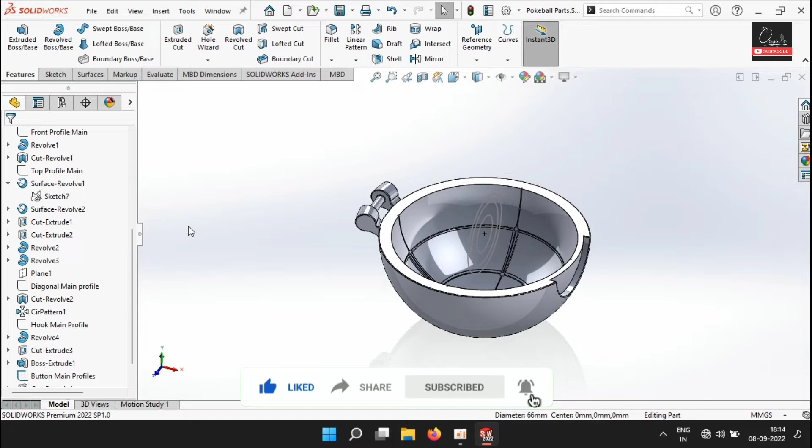In this session, we are going to make the upper half of the Pokeball, which will be similar yet different from the bottom half. First, select the top plane and click on Mirror. Go to the drop-down of Bodies to Mirror, select the bottom half of Pokeball, untick Merge Solids options while leaving the rest as they are and click OK.

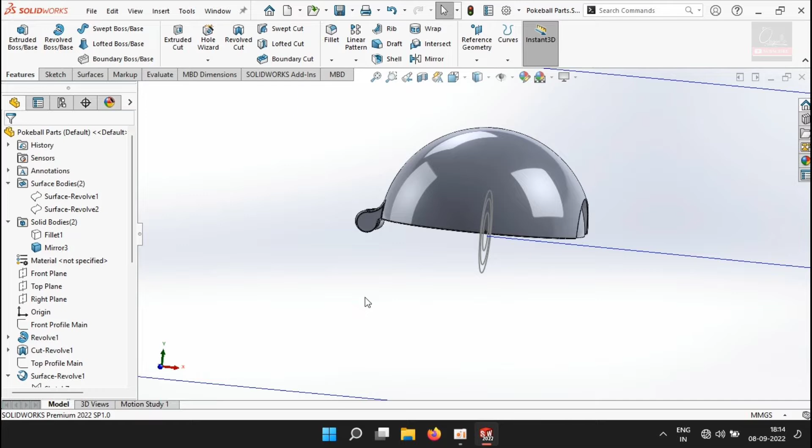Now right-click on the bottom half and hide it. From here onwards, we will make sure that whatever features we use are propagated to this body only unless required otherwise. As we are focusing on making a manufacturable design, let's remove the impracticalities one by one. First, there is a gap between the upper and lower half.

To make it perfectly closed, we will select the front profile main, make it visible again, select the front plane and create a new sketch.

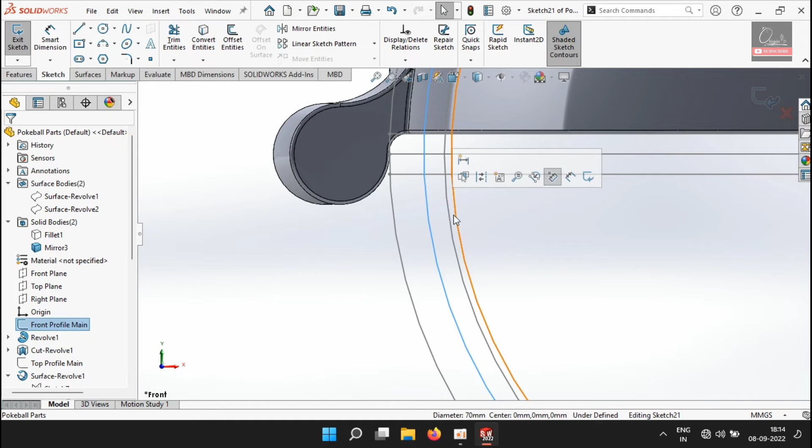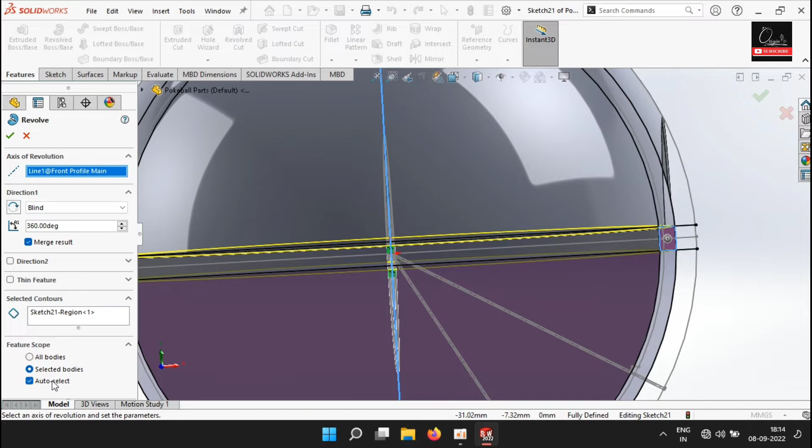Select these profiles and click on Convert Entities. Go to Features tab, choose Revolved Boss/Base, choose this region, untick Thin Feature if selected by default, let Merge Result option be ticked and select this vertical line as axis of revolution. Set Feature Scope to Selected Bodies, untick Auto Select, select the top half and click OK.

The next impractical thing here is the hook, which cannot be same as the bottom. So we are going to get rid of it.

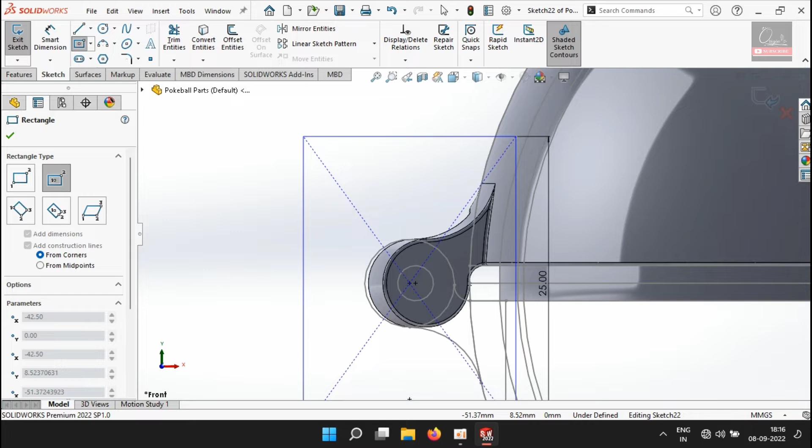We will create a new sketch on front plane, make the hook main profile visible, create a square with leftwards hook center with side lengths of 25 mm, click on Convert Entities, select this circle and press OK.

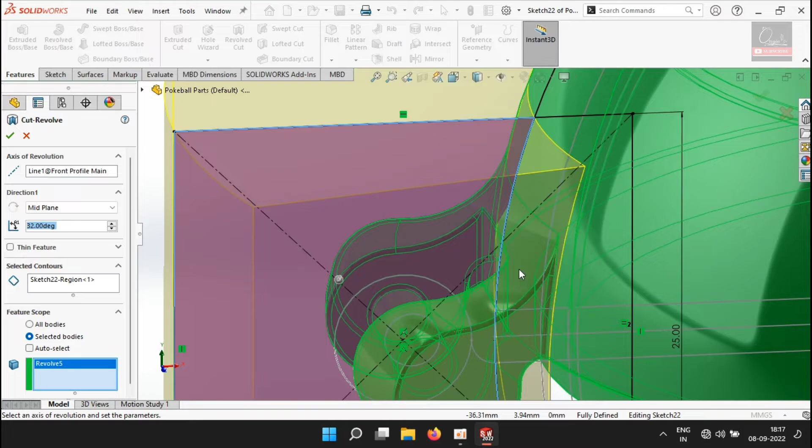Go to Features tab, select Revolved Cut, select Axis of Revolution, make direction 1 mid-plane. Select this region as contour, set Feature Scope to Selected Bodies, untick Auto Select and select the top of Pokeball. Input angle as 32 degrees and click OK.

Though we removed one impracticality, another has arisen at the cut section in the form of irregularity in fillet. So to remove this, create a new sketch on front plane, select this line and circle and click on Convert Entities.

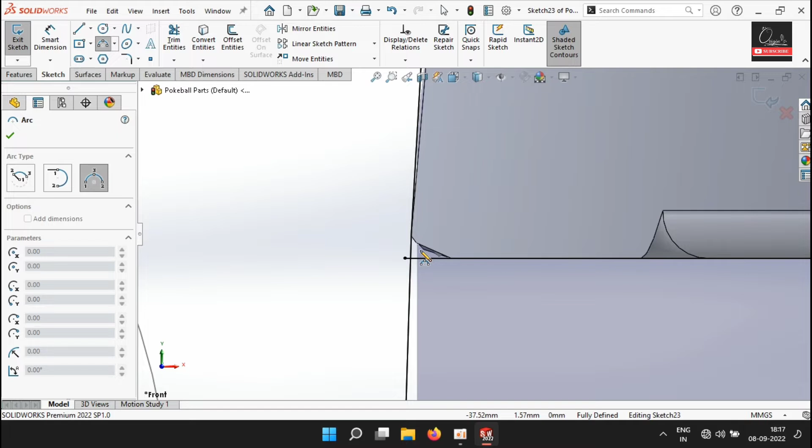Now create a 3-point arc on this line and circle with radius 0.25 mm like me. Also set this arc to be tangent to the line as well as the circle. You might get a notification for overconstrain due to this coincident relation, just remove it and reset the arc point manually.

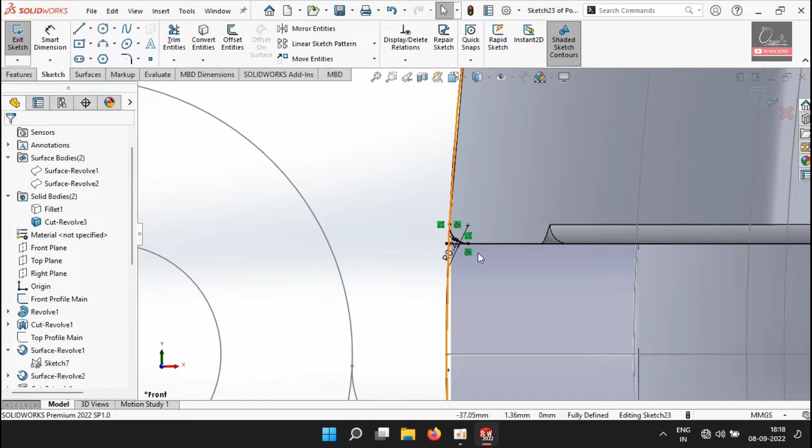Now go to Features tab, click on Revolved Cut and like the previous step, remove the region between this arc, line and circle. And that takes care of it.

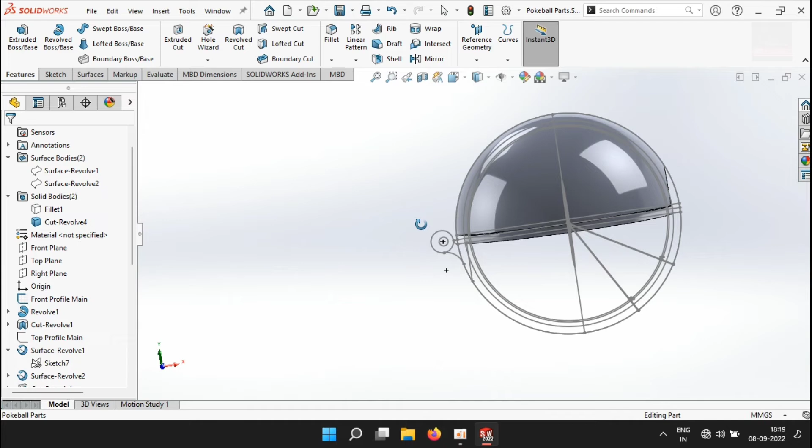With this, you can hide all these sketches for the time being and make the top profile main sketch visible. Our next goal is to make these inner line cuts continuous.

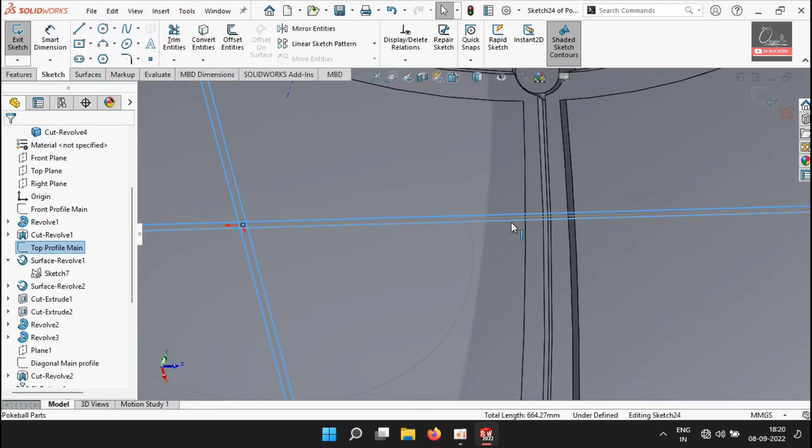Create a new sketch on top plane. Select these profiles and click on Convert Entities. Make the surface revolve 1 visible again. Go to Features tab, select Cut Extrude and follow what I am doing.

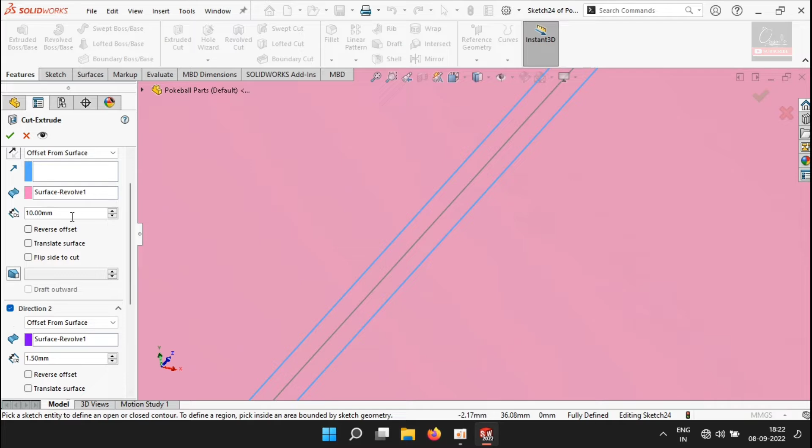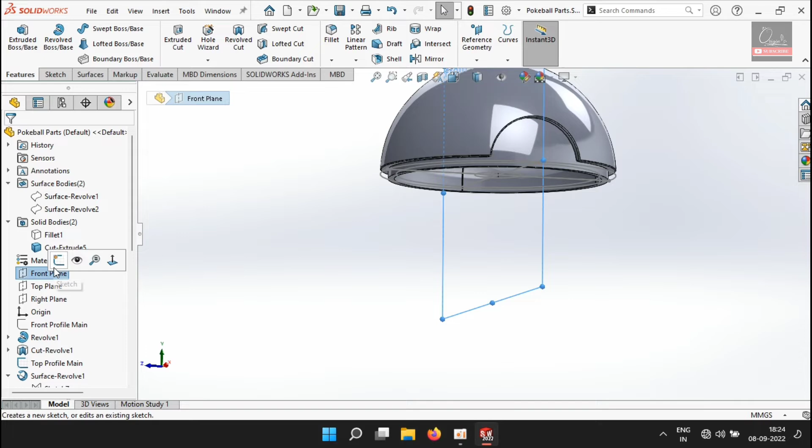That's more like it. Now let's create a hook to be aligned with the bottom half's hinge. Create a new sketch on front plane, make the front profile main visible. Select these profiles and click on Convert Entities.

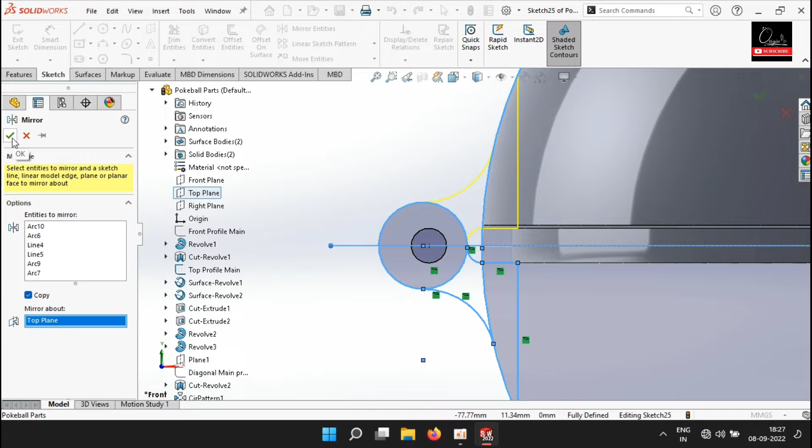Select the top plane, click on Mirror Entities, tick Copy if unchecked, select these profiles and hit OK. Delete this arc and make these profiles construction geometry.

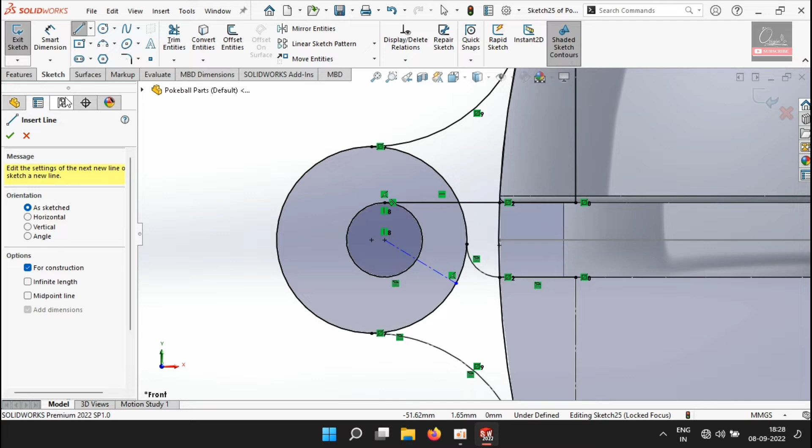Create a horizontal line between the top of the inner circle and the mirrored line. Create a center line from the center of this circle like this. Choose Smart Dimension and add an angular dimension of 22.5 degrees. Create a circle with center on this line and make it tangent to both these circles.

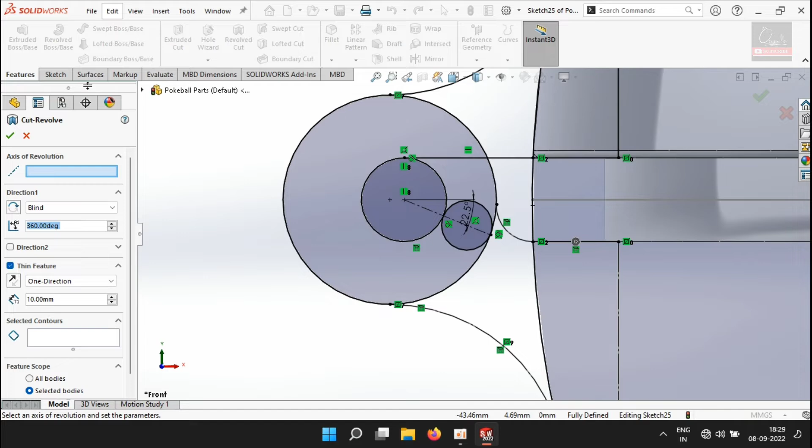Now go to Features tab, click on Revolved Cut and follow my lead. Always make sure that feature scope is for this top half only.

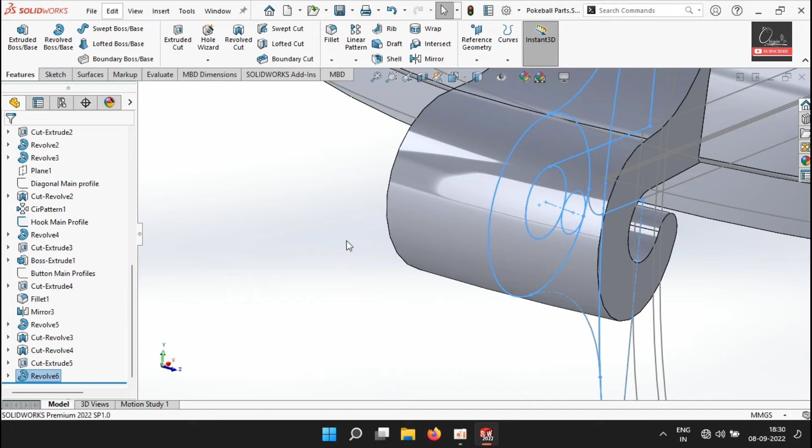Now if you remember correctly, the hinge bar on the bottom half is a straight cylinder, while the hole in this hook follows a curvature, so we need to correct it.

Create a new sketch on front plane, select this circle, click on Convert Entities, go to Features tab, click on Cut Extrude, select through all both, set the feature scope to top half only and click OK.

Now, if you know manufacturing or have learned degrees of freedom, you might know that this arrangement of hook will be subjected to wobbling during opening and closing the Pokeball, so we need to split it into two hooks.

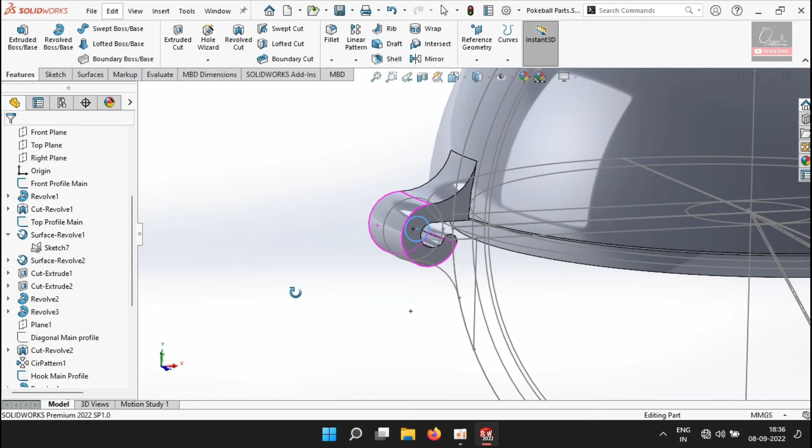Simply create a new sketch on front plane. Make a rectangle with this center of the same dimensions as me. You can take other dimensions as well, just make sure the rectangle is bigger than the hook profile it overlaps with, yet at the same time should not touch the bigger circle.

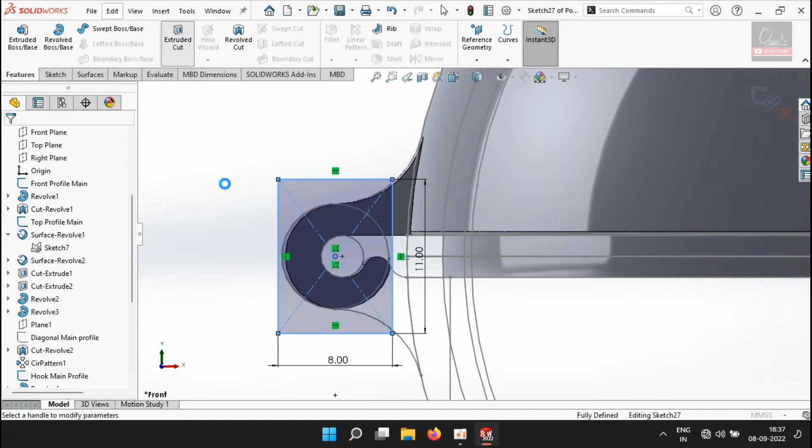Go to Features tab, and create a cut extrude of 3 mm from the mid-plane. With this, we are just one step away from completing this as well.

Now follow these steps to add the cherry on top, I mean the Pokeball button. Hide all the unnecessary profiles and make the button main profile visible.

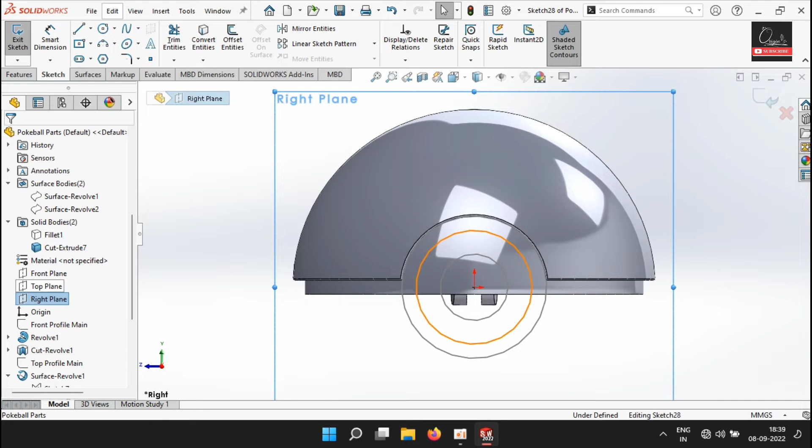Create a new sketch on right plane, select the middle circle and click on Convert Entities. Make the front profile main and surface revolve 1 visible.

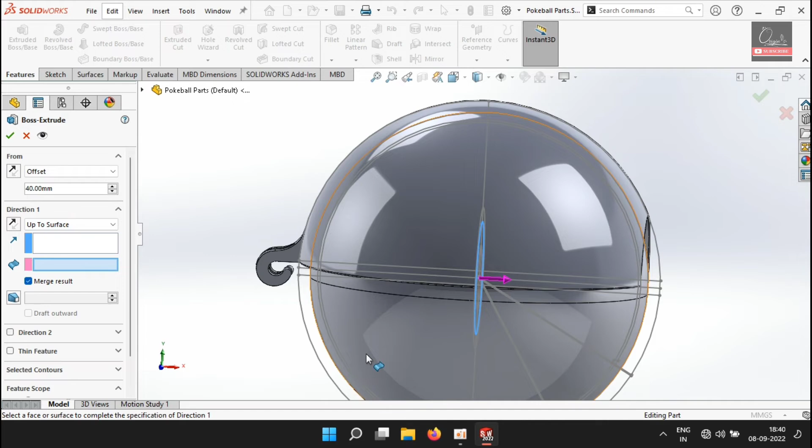Select the previous sketch, go to Features tab, select Extruded Boss/Base and repeat after me. Remember to keep this feature unmerged.

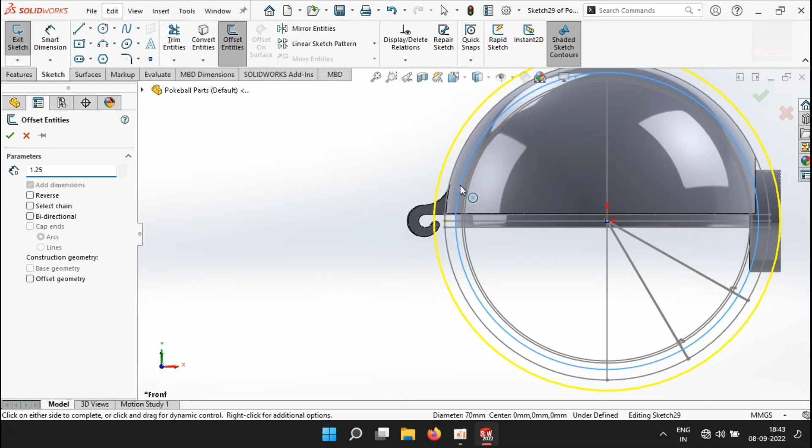Now create a new sketch on front plane and create these offset entities. Create a vertical line at center, go to Features tab, select Revolved Cut, keep all the parameters same as me and specially remember to set feature scope to the button only.

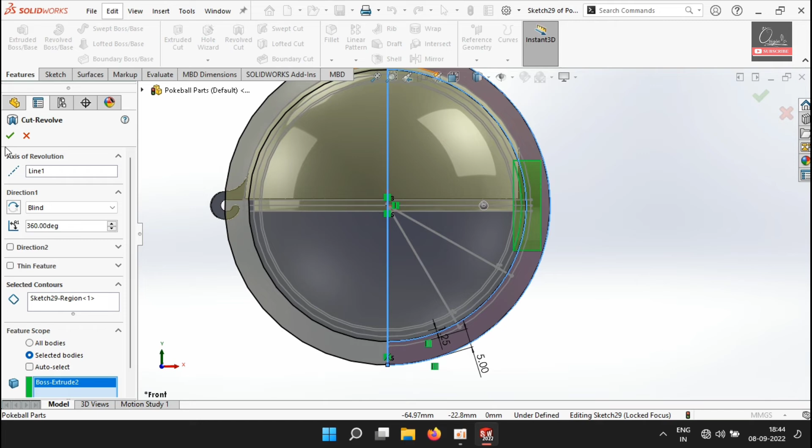Therefore, we didn't merge the button while creating it.

Create a new sketch on right plane, select the innermost circle, click on Convert Entities, go to Features tab, select Extruded Boss/Base and follow my lead.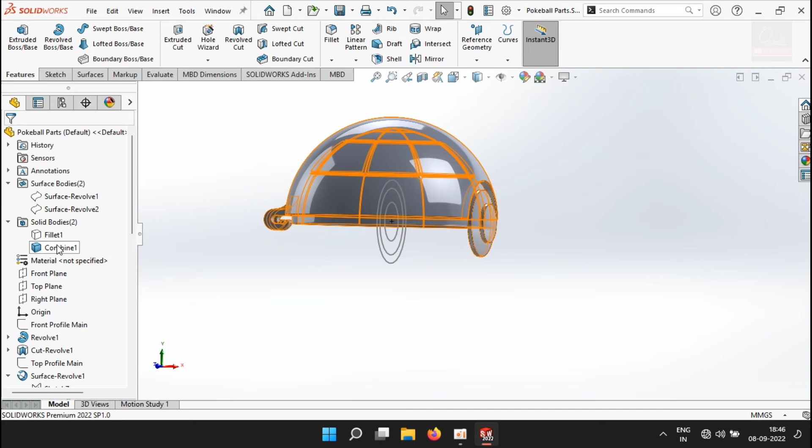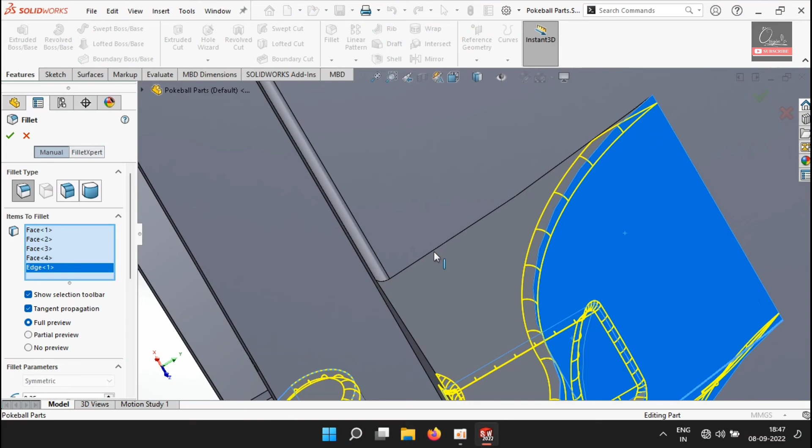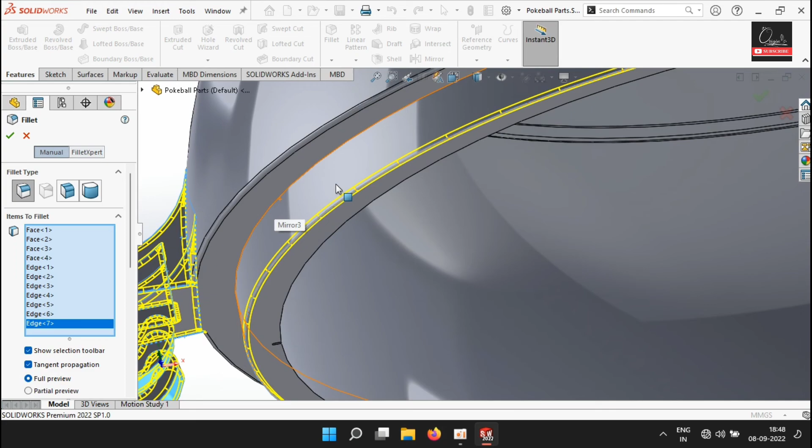Expand the Solid Bodies folder, select the top half and button, right-click on them, choose Combine and click OK. Go to Features tab, select Fillet, choose these edges and faces. Set fillet radius to 0.25 mm and click OK.

With this, our both halves of the Pokeball are complete. You can make them visible and check them out.

Next time, we will be creating the inner glass reflector to be fitted in all revolved cuts and color the Pokeball to make it as close to the one in the show as possible. Till then, keep learning and be the best.